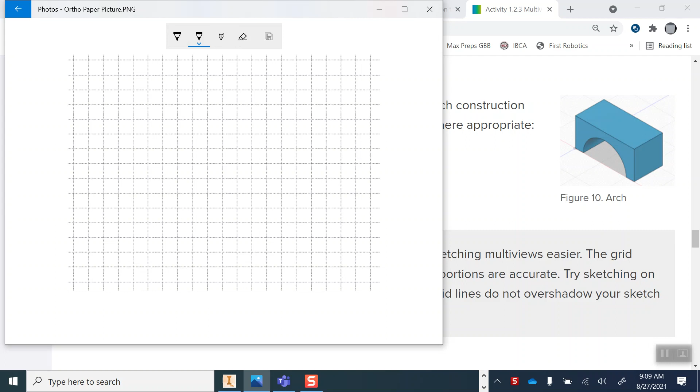So I've got my own orthographic paper here. I'm going to use this light color here as my hidden lines. I'm going to decide to make this 5 boxes wide and 3 boxes tall. So I'm going to start down here: 1, 2, 3, 4, 5, 1, 2, 3 boxes tall. So there's that. I'm going to skip 3 boxes, and then I'm going to make my right side box.

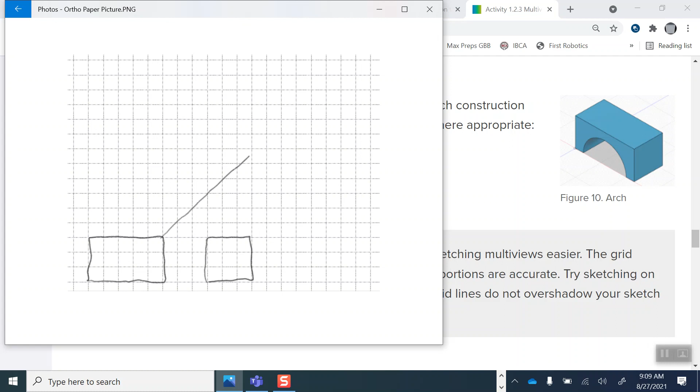There's the right side. And now, hopefully you guys watched the video, and you know that it's important then to project our depth lines up. And then I'm going to project those over from that 45-degree angle. My 45 should have gone through there; I didn't really go through it perfectly. And then I project my width lines. Right there is my height lines. So right here becomes the box.

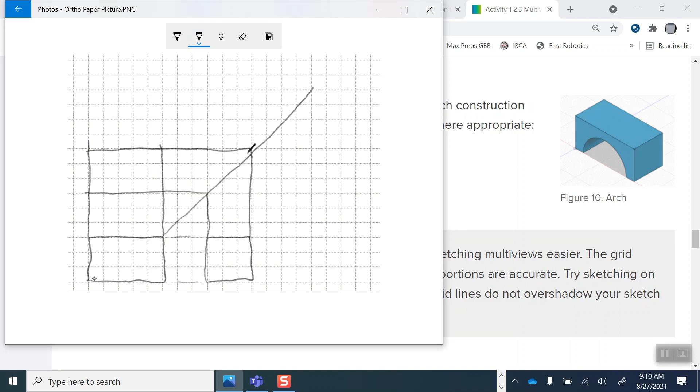Now I'm going to start to draw in some simple parts of this. I'm going to say that my arc is there. That's a beautiful arc. And now I'm going to start to project this line across. If I was looking at it from the right side, this would be my right view, I wouldn't see the arc. So I need to put this in here as hidden lines. And if I project, this would be an edge that I wouldn't see from the top.

So again, I project those up. Now I'm doing it freehand; hopefully you guys would be using a ruler or something. But those right there would also be hidden lines. The last thing then I need to make sure I include is a center point to show that that was an arc. And then up here I'm going to show a center line to show that that is circular. If I don't include this, someone looking at this drawing may not realize that this is an arc, and they may think that this is some type of square or rectangle underneath it.

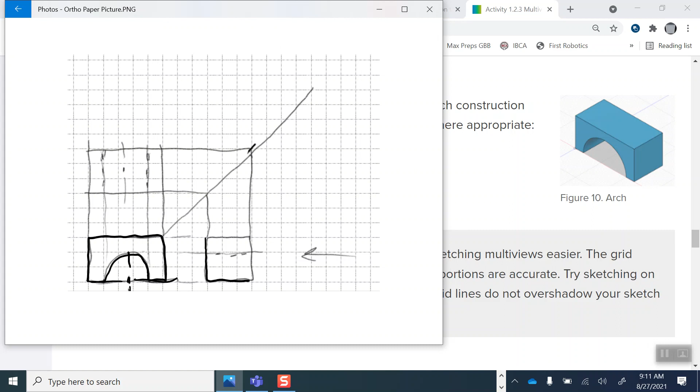The last thing then is to go ahead and add in my object lines, make things dark that I want to make dark. And my hidden lines, and now I'm going to go to the top. Put in the hidden lines again, so just dotted dashes. My center line so that people know that this was a circle. Oh, that's a beautiful sketch. So that's number 5.

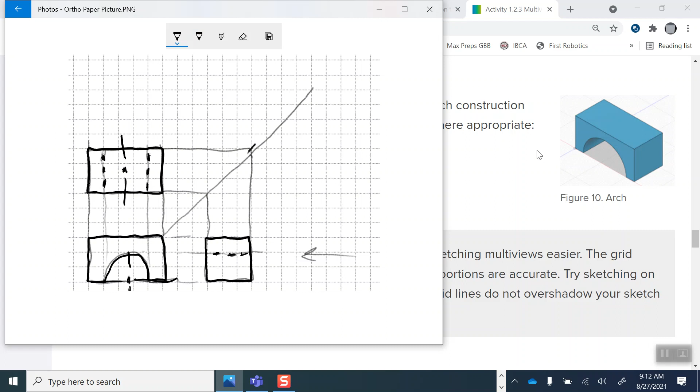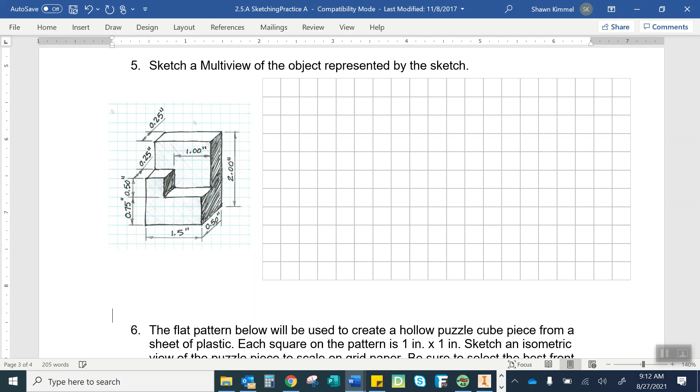The next thing then that I want you guys to do is, gotta find it here, we're going to make this multi-view here, all right? It tells us sketch a multi-view of the object represented by the sketch. So we're not doing number 6 down here. Let's get that off the page so it's not even confusing for you. We're just doing this one. So I want to make this a multi-view of this.

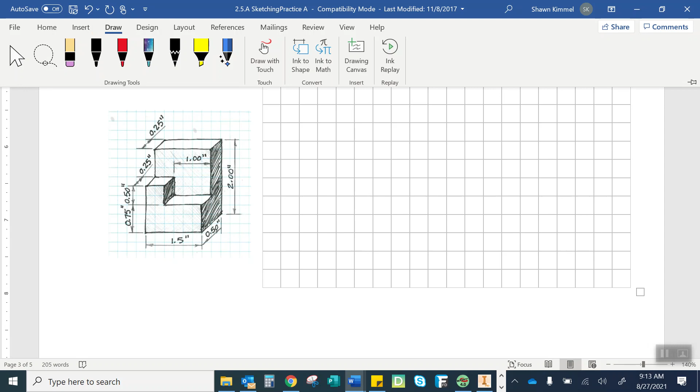Now, as I continue here, I'm going to use these boxes to tell me how many boxes I should make this, because it says inches, but I'm going to try to do these in boxes. And I'm going to double everything. I need a pencil. There's my pencil. If I can change that color. There we go. We use gray, so I have some construction lines.

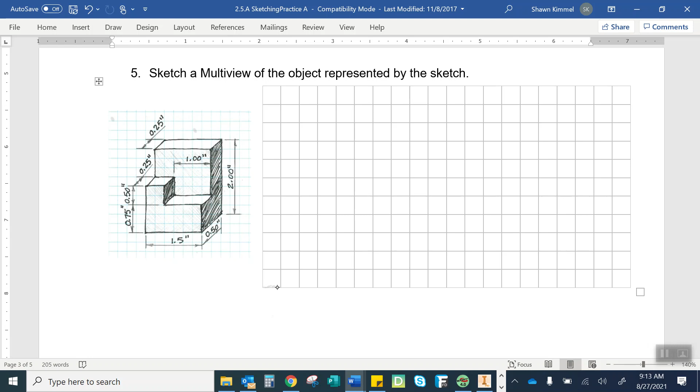So I'm going to just make the box, and it says 2 inches, and I said I'm going to double that, so it's 4. This says 1/2 inch; I'm going to double that. Oh, actually, this right here should be my front view. That's the right side. That's the top. So my front view, it says 1 1/2, which means 3. 1, 2, 3. And then it is 2, so that means 4 tall. 1, 2, 3, 4 tall.

So there's my overall box that it's going to fit in. If I take those lines across, the right side then is still 2 inches tall or 4 boxes tall. I'm going to skip 3 blocks again. And it's a half, so it's only going to be 1 wide. So it's not very many boxes wide at all. So there's that overall box.

If I put in my 45, and I'm trying to take a little bit more time and project these lines up and then over, and then project my width lines up, I know that I now have my boxes, my front view, my right side, and my top view. I have to fit in those boxes there. So now I'm going to start to add these other parts here.

So I would see that line and that line and that line if I was looking at it from the front. So this right here is at 0.75, another 0.5 is 1.25. Well, if I double that, that's 2.5 boxes up. And then, the one thing that it doesn't do a very good job of telling me here is how wide to make that. But it does tell me this over here is 1 inch, which means that would be 2 boxes. So I'm going to go up 2.5. And then this is 0.75, so that's 1.5. So there's going over and up, over and up.

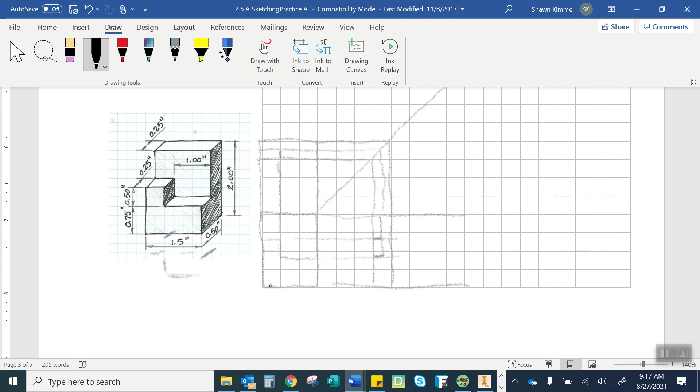All right, so what's left? Now I'm going to take all these and I'm going to darken in the ones that I want to keep. All right, see if I can make this look a little better here now. I'm better at going left to right than I am going up and down, I'm seeing. Up and down is a little harder. All right, so I've got my front view done, my right side view. I wouldn't see a line there, so that's why I didn't go all the way across.

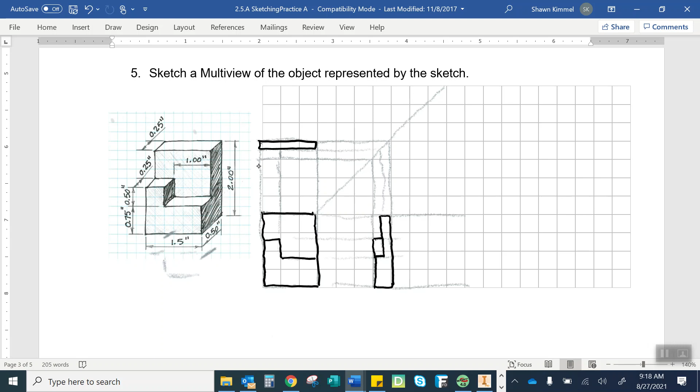Now I have my top view. This would be an object all the way around because you'd see those edges. I would see that line, and that line, and then a line going all the way across. Oh, that line and that line are on top of each other, so they are the same line.

All right, kiddos, that right there is our multi-view then for this one right here. This is our front, right? The front is the one facing us. Here is the right side. And then up here, if we're looking down, this would be the top view.